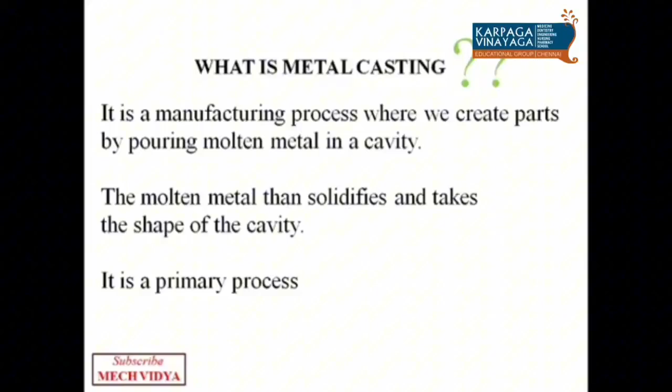After casting, we can do subsequent secondary operations on the product like machining. For example, turning, drilling, grinding, all these things you can do on the product to improve its features. Okay. Now, to make a product of any shape by casting, we need something called a pattern. This pattern is an exact replica of the metal part that we want to manufacture.

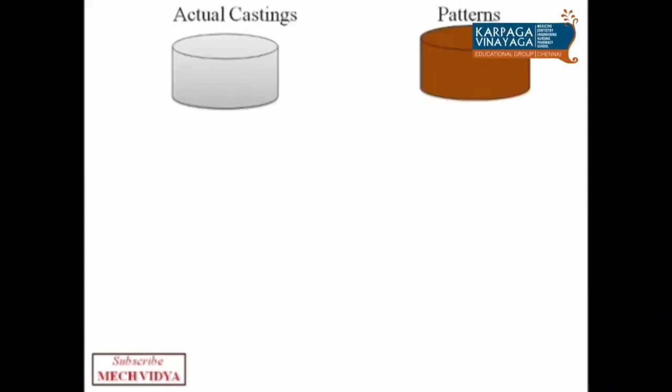For example, if I want to have an aluminum casting of this shape, I first need to make a wooden pattern of the same size and dimensions. So similarly, if I need to create a metal part of this shape, I first have to make a pattern of these two shapes. Okay.

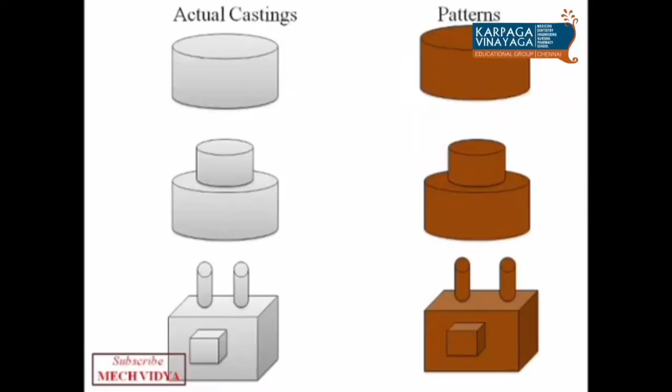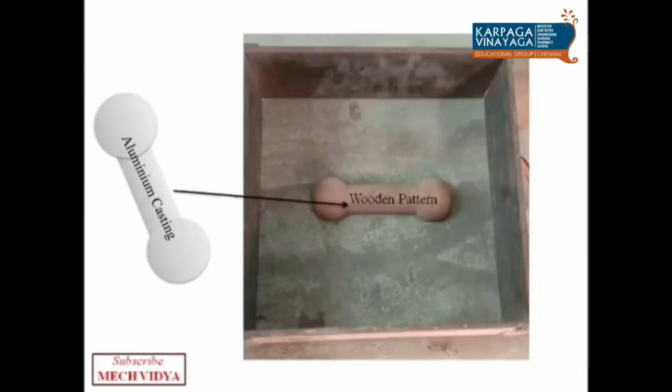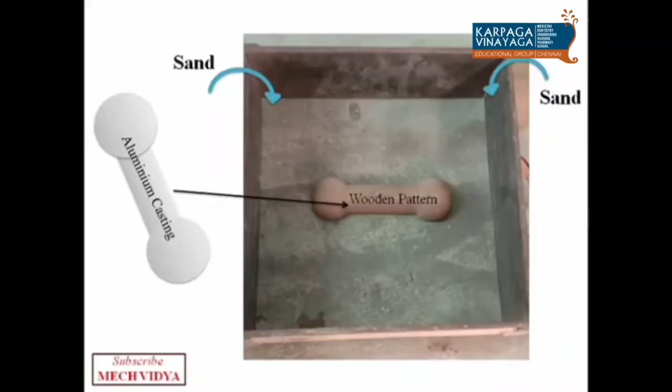Now, if I want to create this dumbbell shaped metal part, first I will place the wooden pattern of this part inside a wooden box. This box is also called a flask. And then the main part, I have to pour sand from all sides and create a stuffing of sand by ramming around the pattern. Now, once sufficient ramming has been done, the flask is turned upside down and the pattern is pulled out of the sand.

The question is, why have we done this? Well, we did this to get this mold cavity. This is the cavity. This is exactly where we will pour the molten metal, that is, molten aluminium in this case, and then we will allow it to solidify, and soon we will get the desired shape after it has solidified.

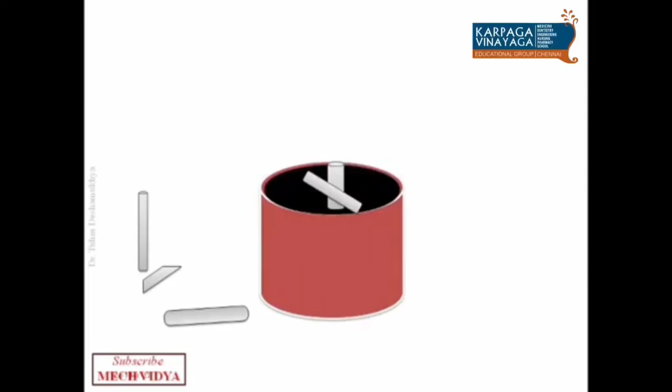Okay, so now let us try to visualize this entire process with animation. First, we take raw materials, let us say aluminium, and then we put all these materials in a furnace. Now, when we start heating the furnace, the temperature increases and aluminium starts to melt. Now, this is one section. On the other section of the foundry, we will now see how to prepare a mold cavity.

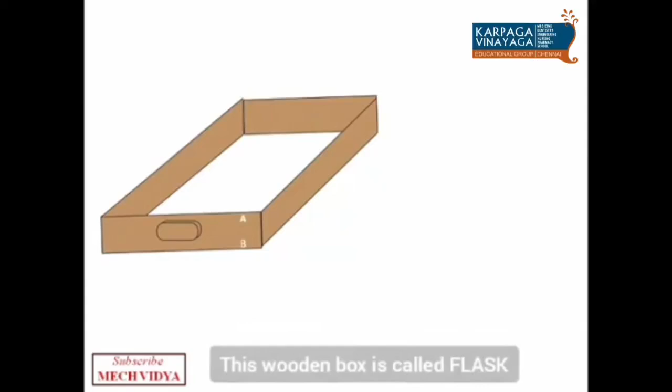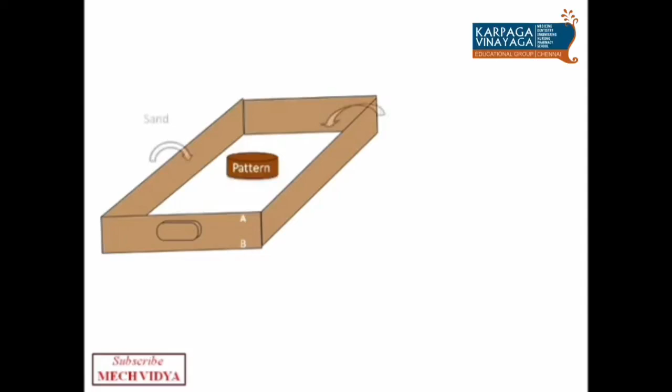Okay, so first I will take a wooden box, also known as the flask, and keep the pattern of the desired shape inside it. And then I'll start pouring sand. Now, after some time, when the sand has been tightly compacted, I will invert the box and pull the pattern out like this. Now, this gives us the cavity. When the pattern is pulled out, a small cavity will be obtained.

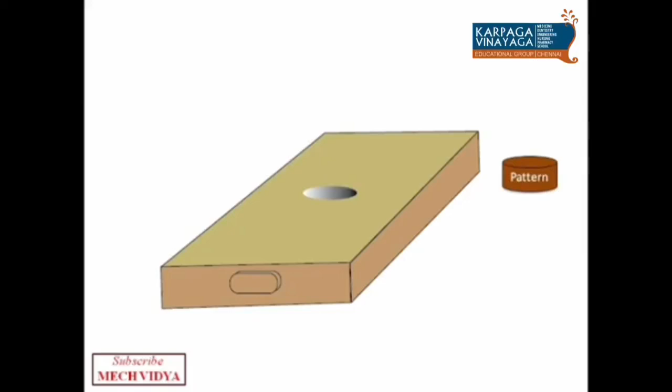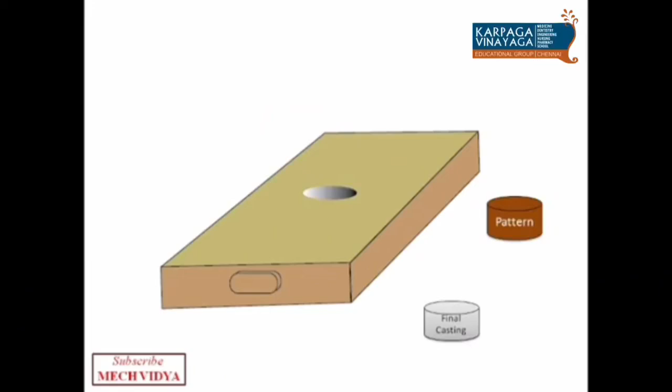Now, I bring some molten metal from the furnace and pour it in the cavity and allow it to solidify. Now, once it has been solidified, we can break the mold and we will get the final metal part. Now, one difficulty arises during the casting of complicated objects. What is the difficulty? Suppose we want to create a very simple product such as this.

So all we need is a simple pattern that replicates this shape. Now, these kinds of simple patterns are called single piece patterns. Now, the problem arises when we have to create a more complicated shape such as this. A single piece pattern cannot create the cavity of this shape. It is because while pulling it out of the sand, the mold will break.

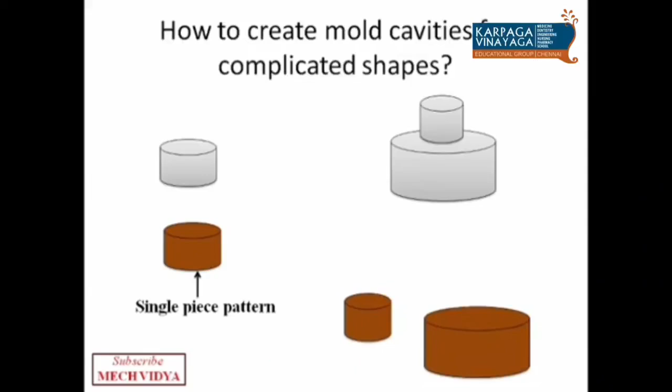Okay, so a far better option is to go for a split piece pattern. Here the pattern is split into two parts and we use two flasks. Okay, the upper part is called cope and the lower part is called drag. Okay, so one half of the pattern goes in the cope and the other part goes inside the drag.

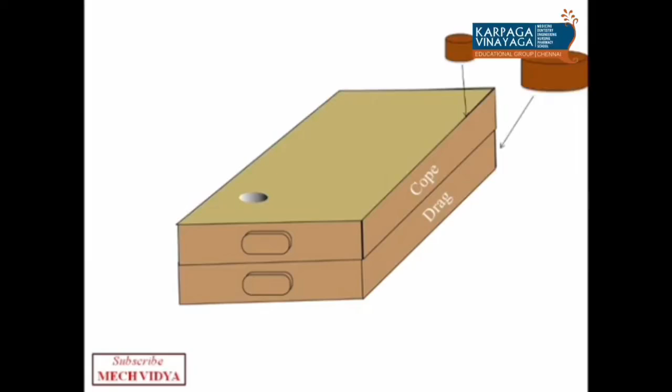And finally, the molten metal is poured in a hole cut in the sand, also known as the pouring cup. This hole is known as the pouring cup, and it flows into the cavity through a gating system. Now, what is a gating system? I will explain this in subsequent lectures. Okay.

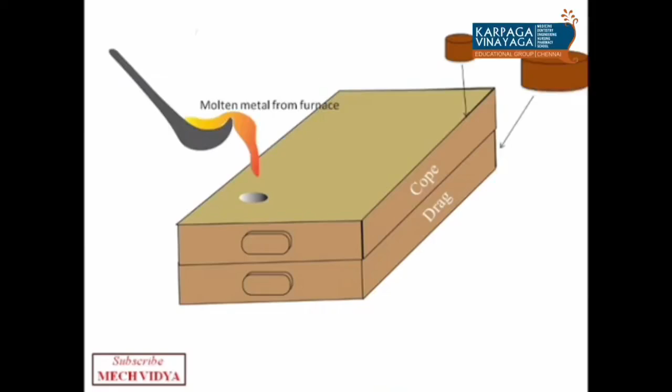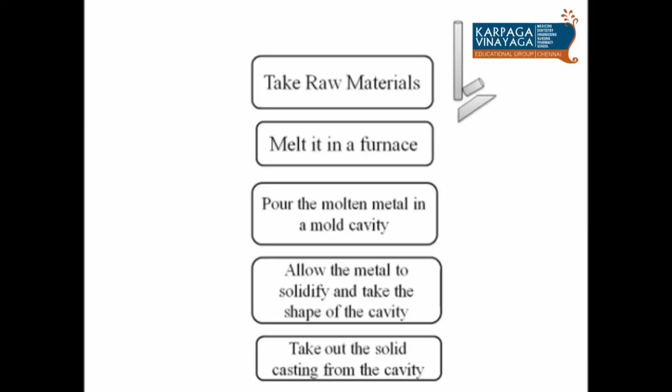So finally, here is the summary of the lecture. First, in metal casting, we have to take some raw materials and then we have to put them in a furnace and melt them. Then we fetch the molten metal from the furnace and pour it in a cavity, and this is allowed to solidify for some time. And finally, once it has been solidified, we can break the mold and get our part.

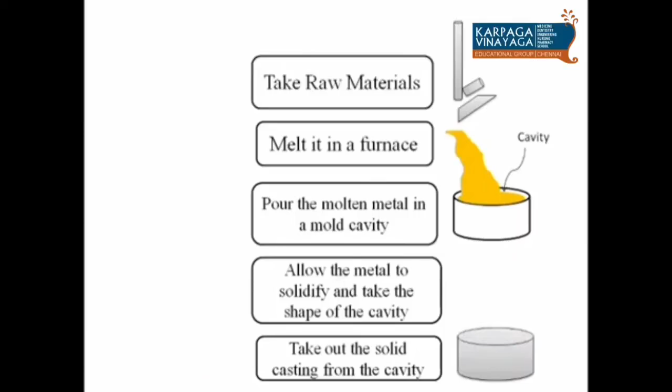So this was all for today. In the subsequent lectures, we'll go deep inside the metal casting process. We'll try to understand all the technicalities of this process.